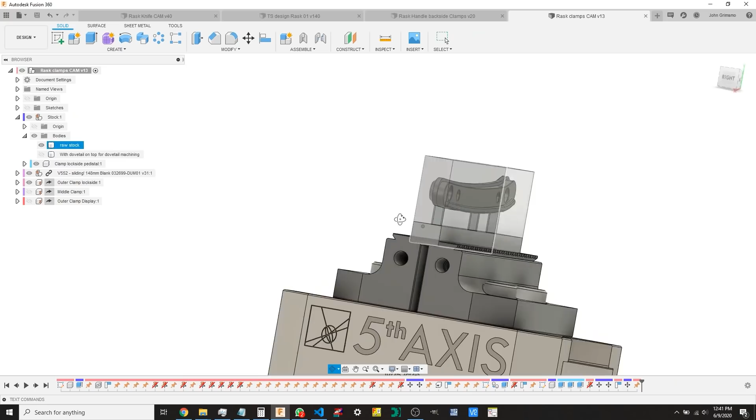I'm gonna do it. So here's one of the clamps that I have to make. You can kind of see what I'm thinking here. I've got two handles - the center clamp is going to hold them both down, and the outer clamps are going to hold the outsides down. There's some little strategy we got to figure out.

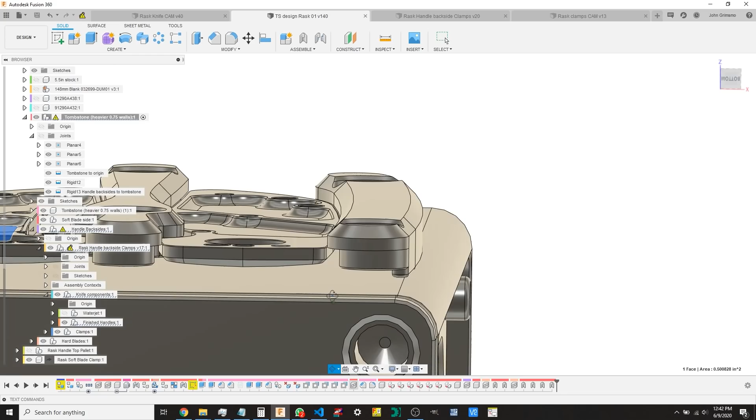Oh, that's wrong - yeah, I just realized I got to move some stuff around. But anyway, one of the clamps is basically going to be made like this, 5-axis style. I'm going to dovetail the material, so one of the options I'm going to do first is put those dovetails in.

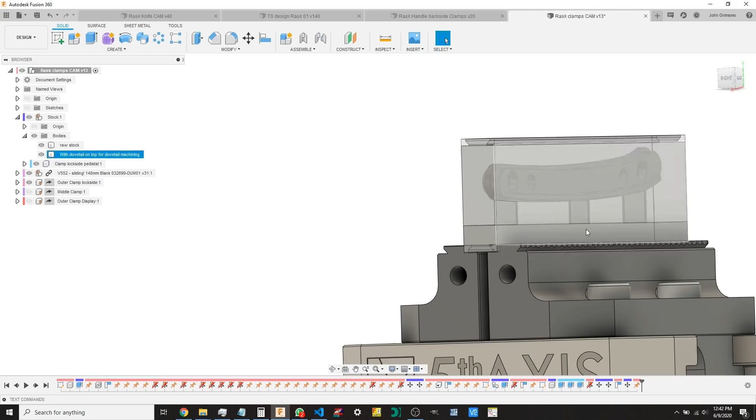And you can see how the clamp is kind of hiding in there. I've modeled in the little remnant piece on the bottom, and I've modeled in my little tabs, and I'm still trying to figure out how to do tabs really well and quickly, but this will work for now, and I'll keep getting better and better.

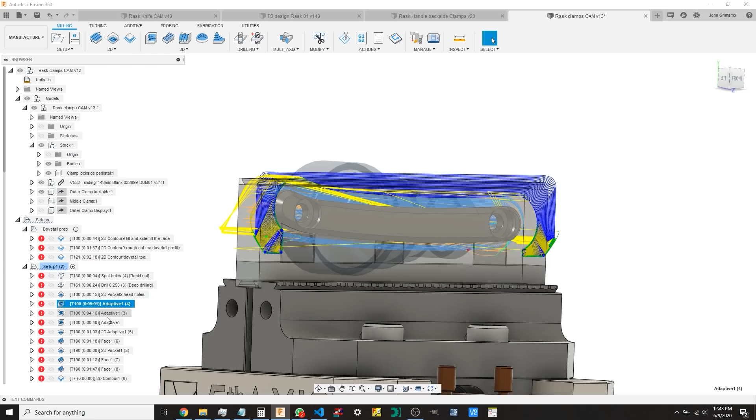But yeah, so I'm working on programming right now, and I'm going to get this thing made today for sure. It's happening. You can see some of the tool paths to get in there - I got to be strategic with how and when I do certain operations. It's getting toasty in here.

Okay, so I spent a while on the computer. Now I'm going to start to clean up some of this stock - a lot of chips from the metal store. Clean that up. This is going in the vise, and I'm going to put dovetails into it.

Oh yeah, all clean - got them all clean and sorted. Now I'm going to label them, the material, the size, so I don't forget.

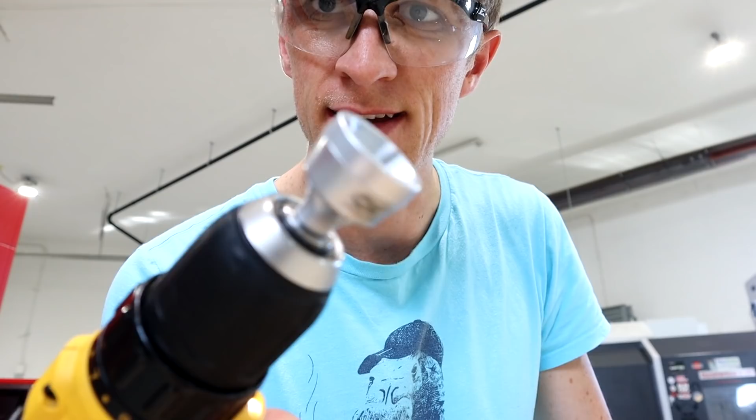Fun little side note, I'm putting a new bar of plastic in the Swiss to make more bearings, and a while ago somebody suggested this guy to chamfer the end of the bars. I don't think it would work really good on metal - I haven't tried it yet. On plastic, it works all right, you just go like this. It does kind of skip and hop and chatter a little bit, but the finish is not bad. I mean, it's not great, but all I need is a chamfer about that size so it guides its way into the guide bushing on the Swiss lathe. So for this purpose, I'm pretty happy with it. I got it on Amazon for 20 bucks or something.

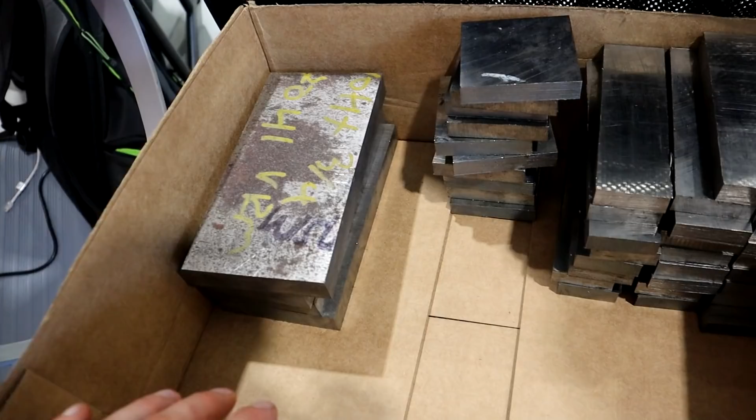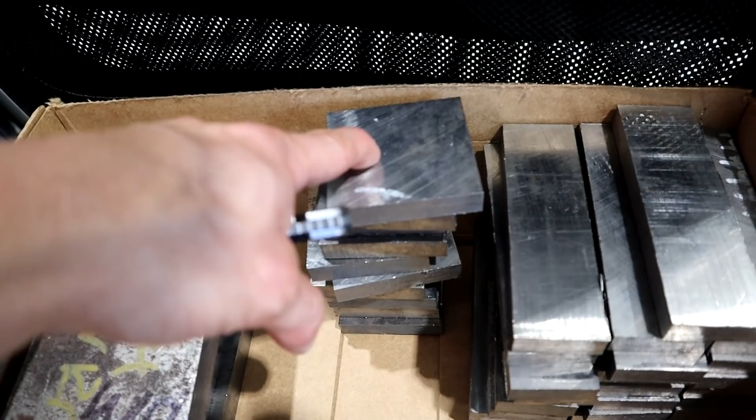So in here we have, this will be a center pallet. This is where handles are going to be mounted for the top side machining, so that we do the patterns and all the 3D machining and stuff. These will be center clamps for soft blades, hard blades, various little things, and then these will be the backside clamps that will hold the handles down to the fixture, plus some other stuff too.

All 4140 HT, about mid-30s Rockwell. Machines beautifully, nice and hard, good stable stuff.

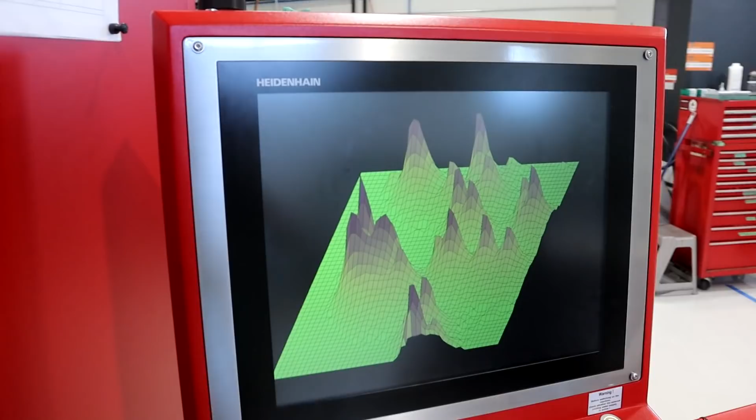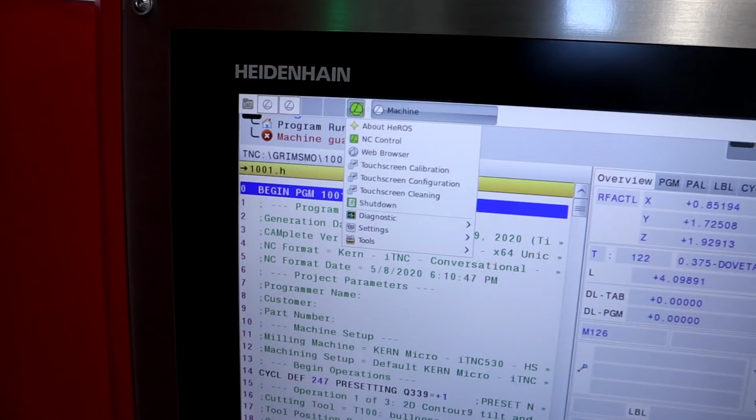I found a new screensaver for Heidenhain. I think it's stuck right now, but it does each line, then line and line. I mean, this thing is just a Linux computer. So you got your Linux down here, and I found the screensaver, kind of cool.

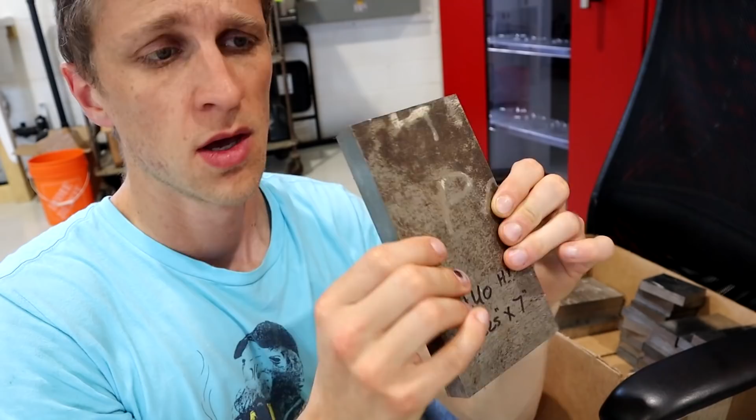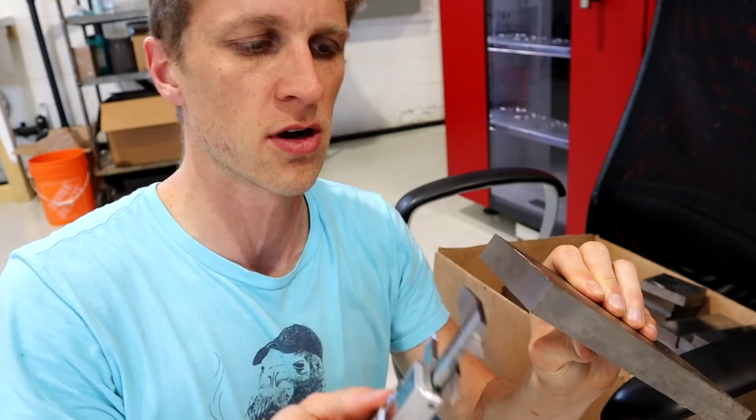I just noticed something I was not expecting. So this one in particular, a lot of this is made from plate stock as opposed to extruded channels. Now I'm no expert level metallurgist or purchasing agent, but depending on the kind, this is 0.7915. I was expecting 750, three-quarters of an inch, and a lot of bars are three-quarters of an inch when you buy that. Some are oversized. This is like 41 thou too thick.

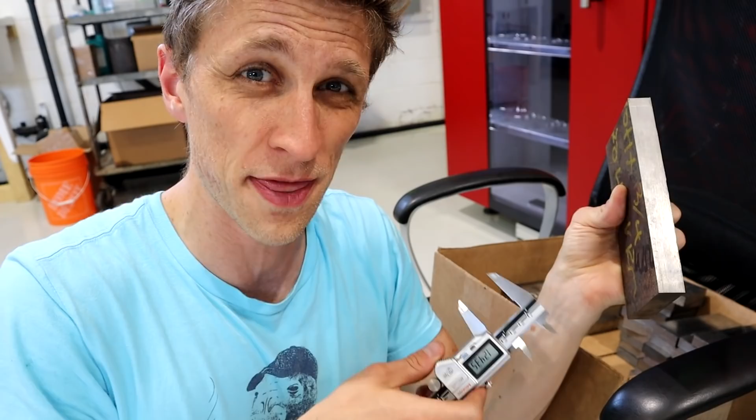That breaks tools differently, you know what I mean? It's fine if I model it in the computer with the exact dimension that the stock is, but I need to know what that exact dimension is instead of typing in what I told them on the phone. I need, you know, 3 by 7 by three-quarters of an inch, and they oversize it, and those oversizes are gonna get you. They're gonna break tools because the tool's gonna come in and think there's air there, but there's actually more material. So it's fine, but I gotta know.

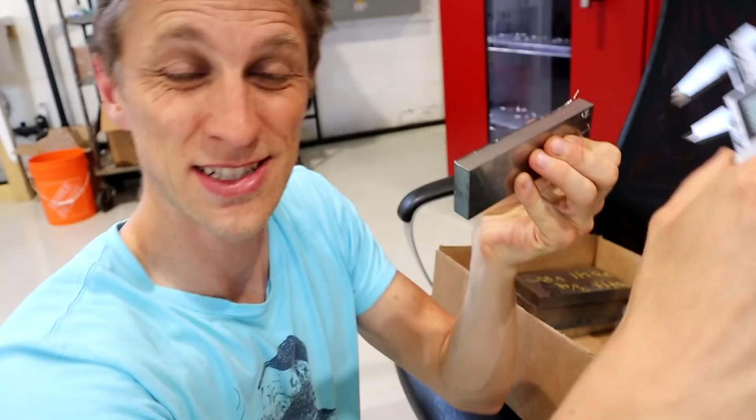So the clamp that I'm working on today, I haven't measured this yet. Let's see, yep, 530. That is 30 thousandths of an inch thicker than I'm expecting it to be, which is a big deal. So I need to go into my model and make sure that it knows that. I'm also gonna get width and height as well.

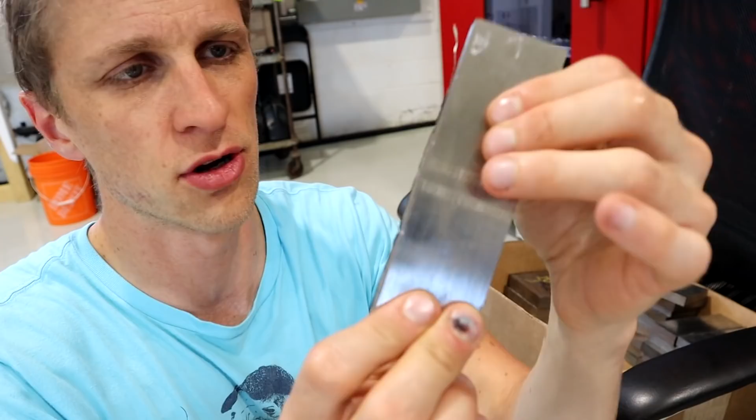And they're cut on the lengthwise. These are just cut from a giant plate. Looks like there's cuts on all sides. Not what I was expecting, but whatever, work with it, right? Yeah, interesting.

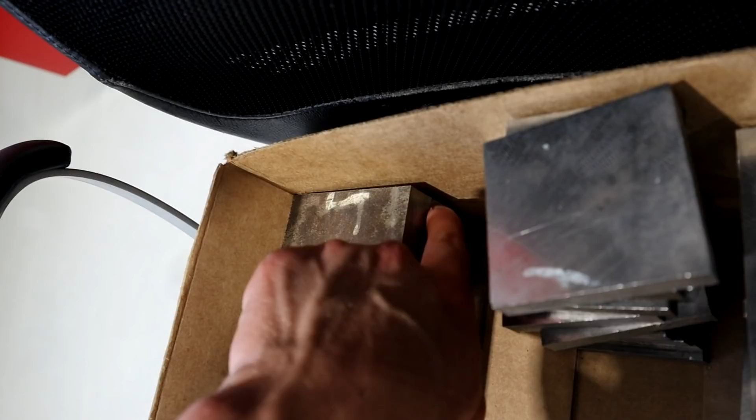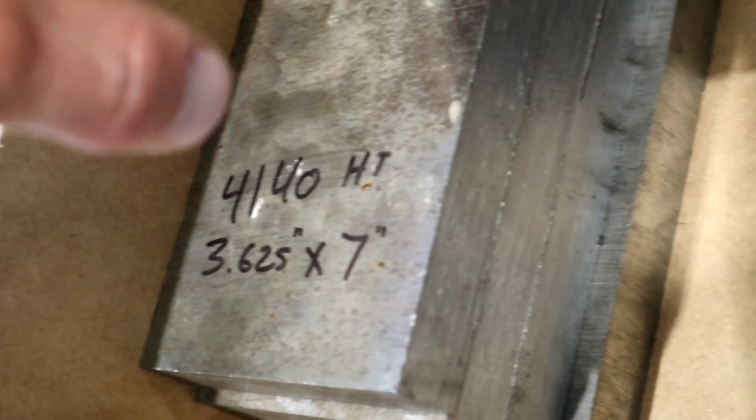Check this out, this is even better. So the top piece and the second piece, I've got them more or less lined up in the back. Look at the length difference between the two, that's like 3/16 of an inch. That's huge, man. So either I'm gonna have to cam up the stock as the biggest piece and just let the rest be kind of small, or I cam it for each individual piece of stock. That's less than ideal, but I'll make it work.

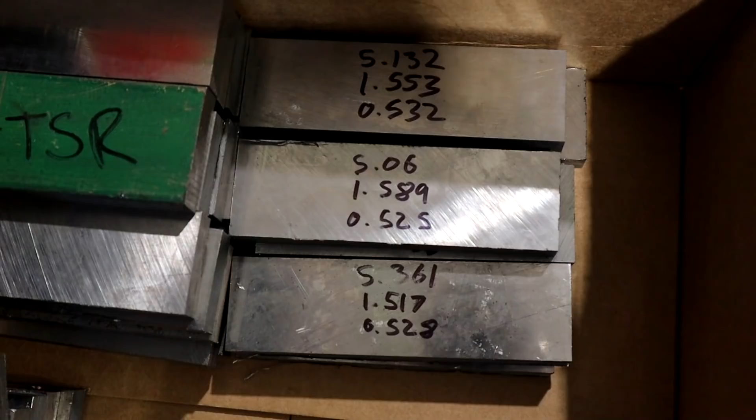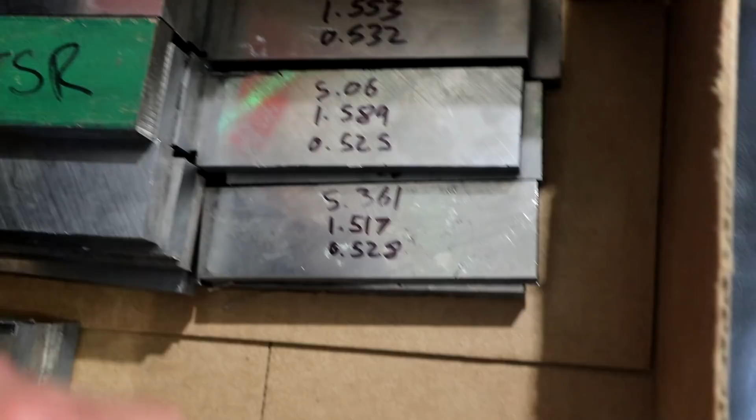So you can see these ones just in length, width, and thickness. Thickness is pretty much the same, but length, I mean 5.06 to 5.36, that's a 300 thou difference. That's insane. So I got a plan for the biggest case. Luckily the part is well within limits, well smaller than that, so plan for the biggest one, I guess.

Okay, finally I think I am ready to make some chips in the salsa machine. I just made that up. Okay, I got my material loaded in the vise, it's torqued down, centered left to right, and it's tight. Those sizes are in cam.

I've run it through Complete. So the stock size, I recalculated all the tool paths. New code's loaded on the machine. I think we're ready to rock. All this for a silly little clamp, not even a clamp, just the dovetail to hold the clamp. Okay, let's go.

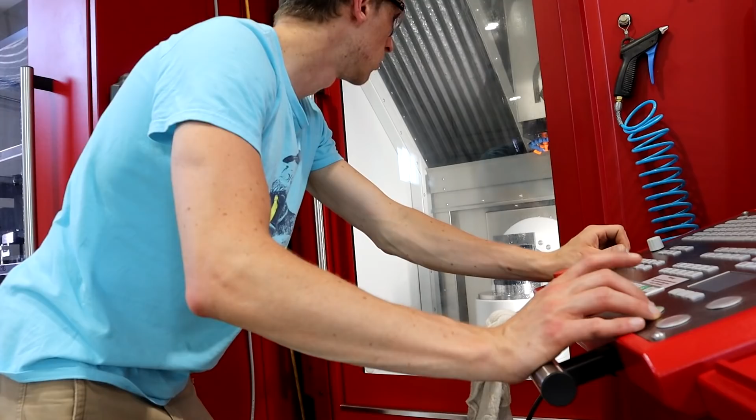Oh baby. Okay, you can just sit here.

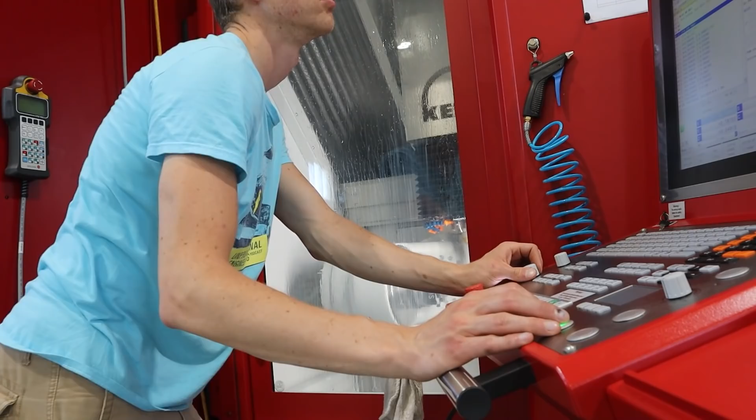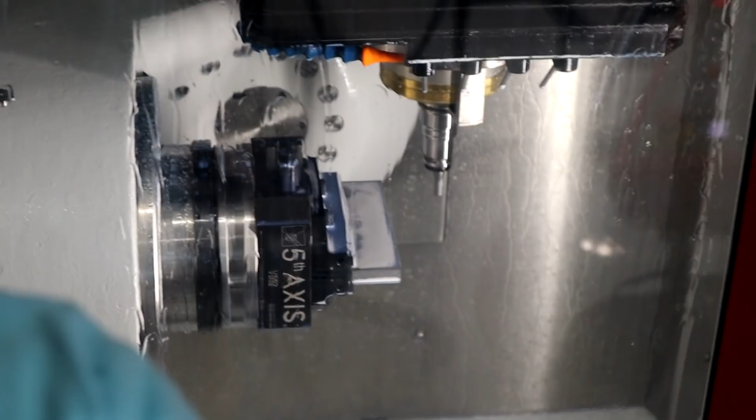Can you see how far away that is? That's like that far away from the material. Ah, I did something wrong. The heck did I do? Oh, I know what I did wrong. I forget why this happens. Check this out.

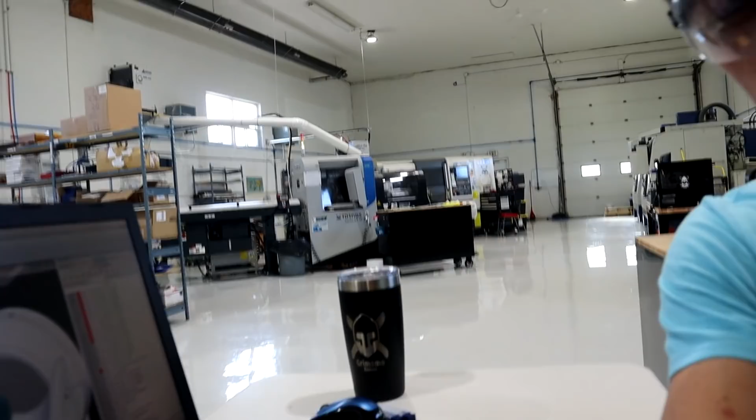Can you see right here where the vise is not properly aligned with the stock? I thought I fixed that, but I missed it. Okay, I know how to do that. That's why you always walk in programs until you have this insane confidence in everything you're doing. I'm not there yet, some guys have it for sure. I'm getting close. I'm getting frustrated.

It's still this far away, and the easy tricks are not doing what I thought it was going to do. It's like I'm not actually updating the code, but I should be. Maybe I'm just doing something stupid, I don't know. It's the end of the day, I want to go home soon, I have to go home soon. Come on. Ah. Silly. Ah, it's still off, I gotta go.

My time is up. I will come back in the morning with a fresh brain and I will tackle this, and I will nail it, because it's something stupid and I'm not seeing it right now. So, later guys.